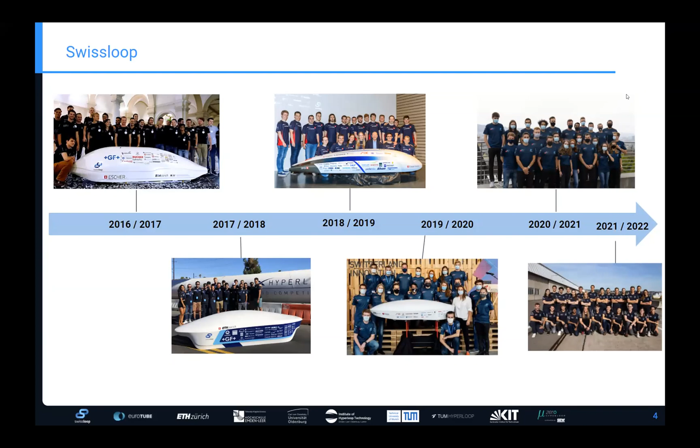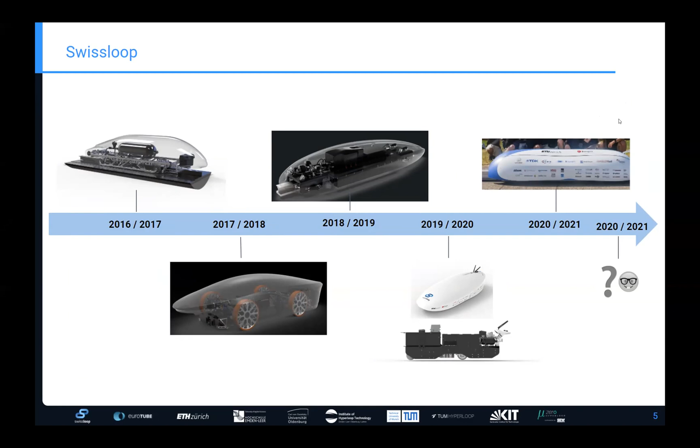In comparison to the previous slide, you can see an overview of our pods, what we've been researching and testing. We started off at the very beginning with cold gas propulsion, then followed by a pod with electric motors. From 2018 on, we focused a lot on linear induction motors and their propulsion. Afterwards we had 3 pods developed and produced where this technology was further refined and improved.

Our next pod will be revealed in around June. We're looking forward to that, and next semester we can include the new pod also in the introduction. Now I would like to hand over to Daniel from the Eurotube Foundation, to give a short introduction about Eurotube.

Just a short wrap up about what Eurotube is about. We are a foundation categorized as a research institute of national importance. Via this status, we've been granted funding from the state, which we use to develop our technologies. As you can see on the right-hand side, we not only concentrate on research and development of our infrastructure, which is our main focus, but we also enable an incubator and transfer platform where other teams, academia, and industry can get together to jointly develop technology towards the Hyperloop industry.

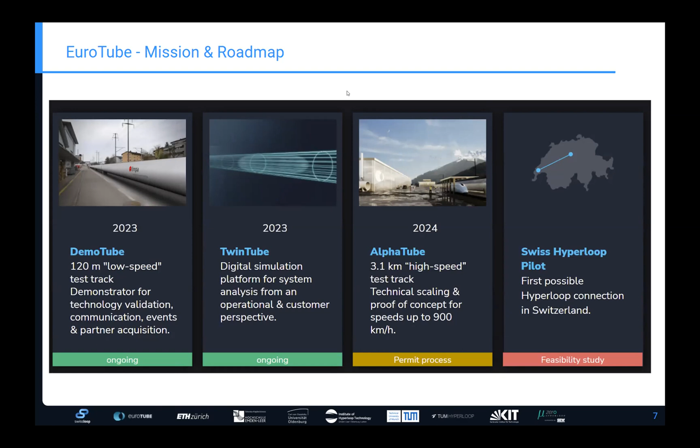To give an overview of the technologies and research projects we've carried out over the last years, you can see on the top left the first prototype of our concrete shell, the so-called Alpha shell, co-developed with Creabeton.

In a second iteration, shown on the bottom right, we permeated the concrete tube with a polypropylene liner, which we successfully tested under vacuum to reach 1 millibar, the pressure we are aiming for in our test facilities.

A picture of how different types of liner have been tested can be seen on the left-hand side. On the top right, you can also see a prototype of a valve, which we are co-developing with the manufacturer Fawate, to have a first prototype installed in our demo tube test track next year.

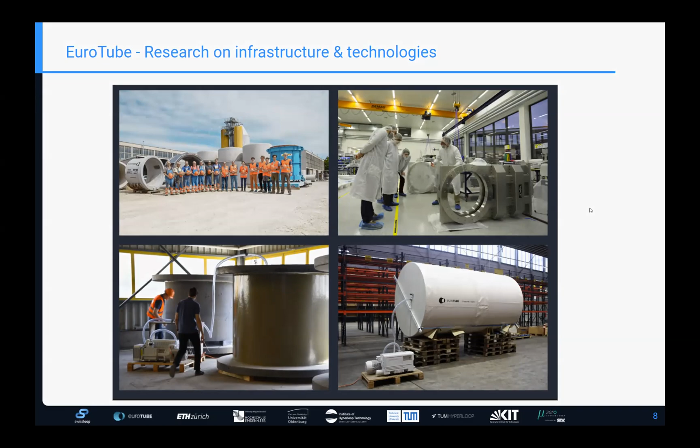We've implemented that into our studies in engineering physics, and now we are focusing on the research side, where we are looking forward to implementing a European Hyperloop test facility, a large-scale research infrastructure, at the old Transrapid test facility.

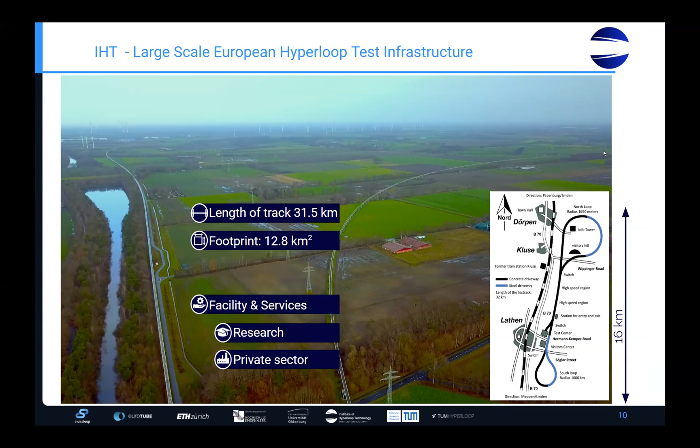On the next slide, you can see that we have phases mapped out for this — three phases you would need to start. First you would look into the superstructure, because as most of you probably know, there is still a lot of development on Hyperloop going on, and not everybody agrees on the special subsystems.

There might actually be a lot of development and innovation going on in the subsystems right now. That's why you start with the superstructure, start with the tube, set up a few of those, and test how elongation, weather, and everything like that affects the infrastructure.

Funny to say, in the second picture you see the Transrapid running, and it was actually only performing from 10 o'clock in the morning to sometime in the evening for some days, because the temperature variations were too high and the track was bending a lot due to these temperature changes.

There's a lot of things you can actually start with early on, and at the end you will have to do the 32 kilometer infinite loop, where you can test full scale, all year round, basically around the clock.

We are also looking into transportation, and how Hyperloop fits into transportation. That's what we are doing in the Epicenter project, an EU project where the impact of new technologies and trade routes is studied. That's where we are doing a lot of logistics related Hyperloop research.

Then there's also the Hyperloop development program, where we are looking into the European Hyperloop roadmap and into large scale research infrastructures. And with that, I would like to conclude our slides and hand over to Elias.

Hello everyone, my name is Elias. I'm team leader of TUM Hyperloop, and I'm happy to represent our team today. I'm pretty excited that we can have the Vacuum Transport seminar on time again, since we benefit a lot from it, not only presenting our own subjects, but also getting inspired from the other topics. That's pretty cool.

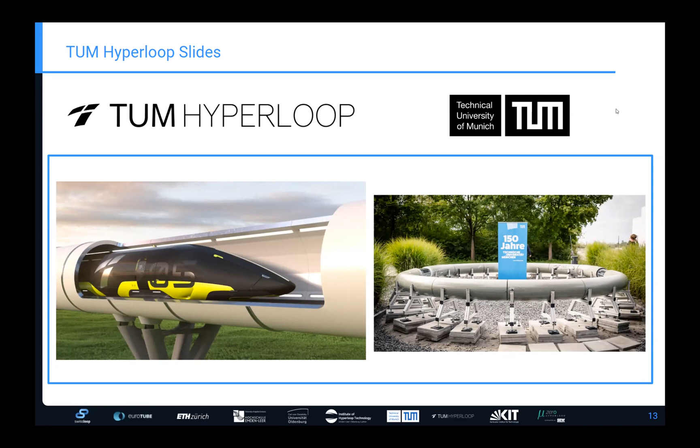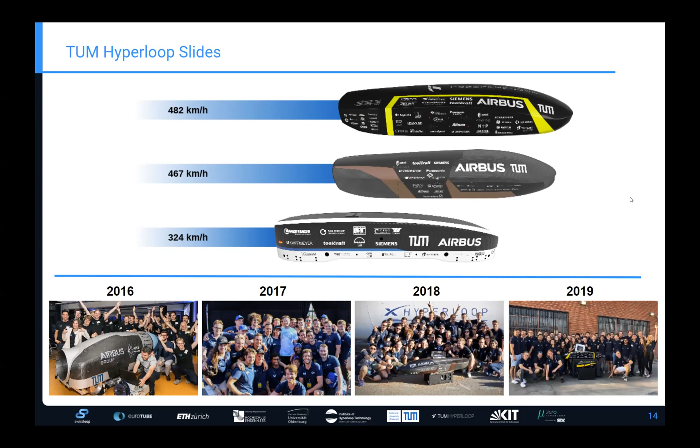That current project started with a small scale ring that you can see here, seen in our first slide on the right-hand side. That's in the past. Now we're really working towards this full-scale demonstrator. This is where all the energy basically goes into, and then we have more major steps towards this Hyperloop technology in a transport environment.

Why I think we can achieve this big mission is because we are positioned in quite a unique setting. We have the Bavarian government supporting us, not only at the press events that we're holding, but also in this whole Hyperloop vision that they're creating within Bavaria.

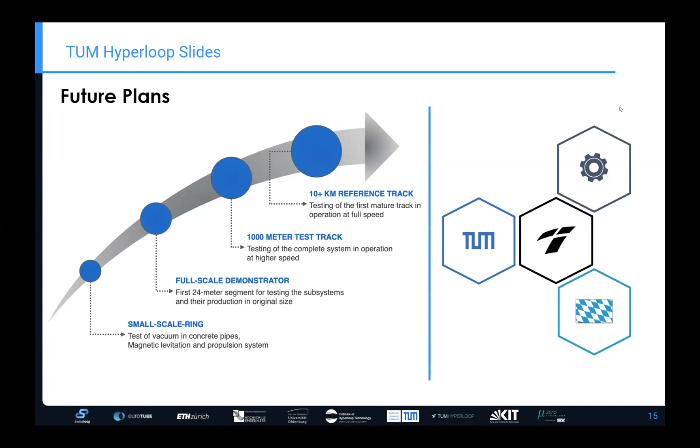Then we have TUM, so we have quite good contact to all the professors in different environments, and also a lot of TUM students who benefit from that, with a big background in technology. And last but not least, we have all the industry partners that were along the road during the competitions, who are going to support us also during this project.

The research areas we're following are the technology development of the demonstrator, some simulations and modeling, feasibility studies and route planning, as well as safety analysis. We also have some talks coming up from our side, happy to announce them in later sessions. Thank you very much.

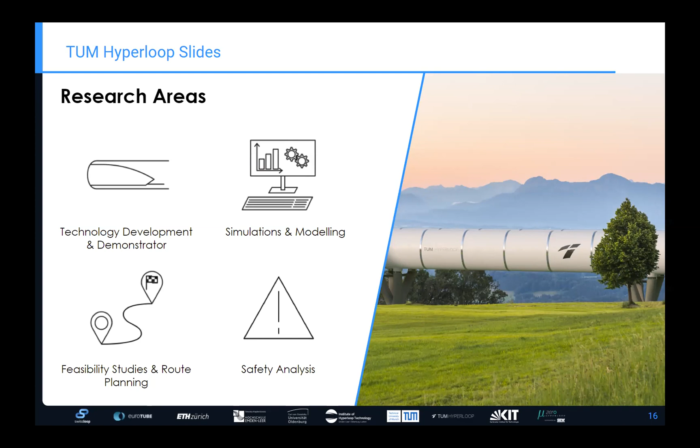Thank you, I'm Pia and I'm representing mu-zero Hyperloop here today. We're really happy that we can also be a part of the vacuum transport seminars. We are quite a young team, only founded in May 2020, so we're only in our second season, and right now we have 71 motivated team members from 4 different universities in Baden-Württemberg. They have all quite different fields of study, so we have a quite interdisciplinary team, and it's really great to work together with them.

Right now we are focusing on building prototypes for the EHW. In the first season, we built our first prototype with a linear induction motor, as you can see on the next slide. We took part with it in the EHW, and it was great to see it run and perform, reaching up to 74 kilometers per hour.

Did the slides change for you guys?

The acceleration we achieved was 5.4 meters per second squared. We were really happy to achieve this in such a short time.

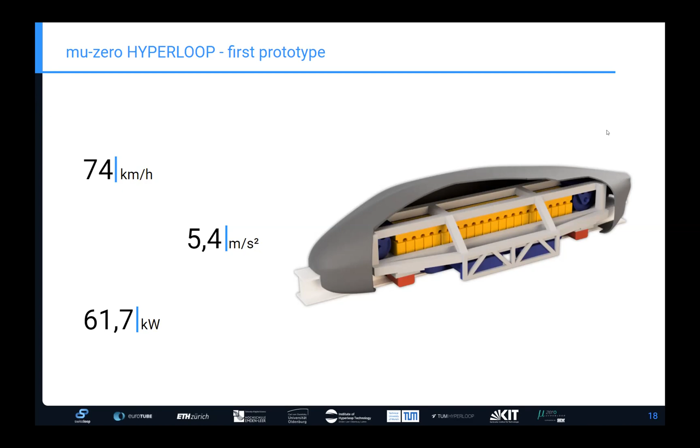For the second season, we want to build on what we already achieved, and we're building two prototypes this year. One is a second iteration of the pod, where we're going to focus more on the shell, the battery, and our frame. The other is more of a research project, looking more into electromagnetic suspension and doing another prototype with this concept. We're also doing more research with theses on general Hyperloop topics, one of which will also be represented here later in the series. Thank you very much for having us here as well.

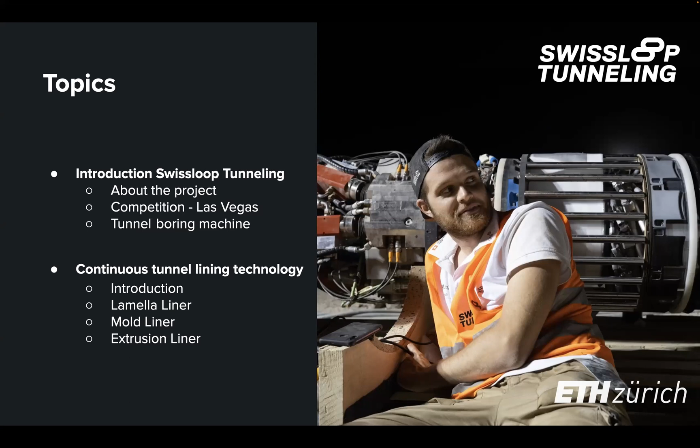Quick introduction: my name is Luca Ontrum, head of mechanical and civil engineering at the project. I've been in the project for about 1.5 years. And I'm Lucas, head of infrastructure and logistics. We recently updated this, so Daniel may have introduced it slightly wrong, but that's fine. I was head of mechanical and civil engineering, and I've handed it over to Luca for now, taking over infrastructure and logistics while helping out anywhere I can, since I've led many subsystems along the way. I started this journey leading soil erosion, which covers the cutting head and the transportation of material from the cutter head to the surface.

So we'll move forward with introducing the project. You can see us here, part of the team at the Not a Boring competition in Las Vegas last September, which we'll talk about later. We were founded in 2020 by engineers from Swissloop, the project you got an introduction to earlier. We now consist of about 60, maybe a bit more, students from different specializations - mechanical, civil, electrical, computer science, and economics - so quite a broad spectrum, but we need every aspect of it. The stages differ too: we have bachelor, master, and doctoral students, as well as some industry partners who were with us at this competition.

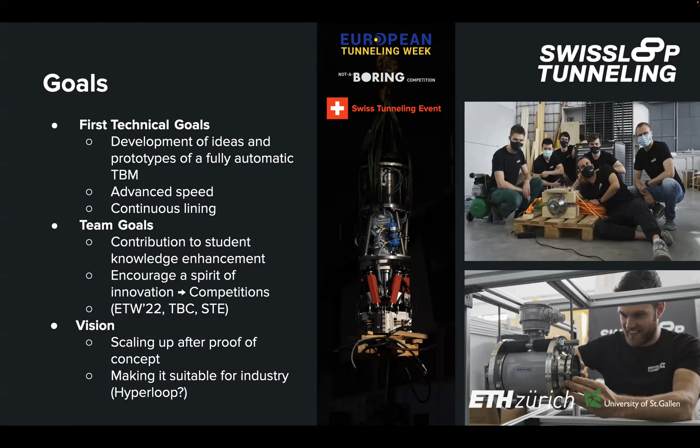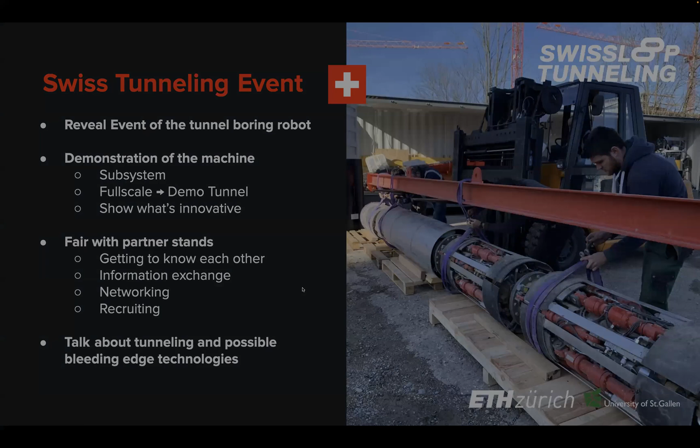Quickly about the Swiss Tunneling event: it's where all our industry partners, of which we had about 90 last year, can come see our machine dig and also do recruiting with ETH students, which is often very interesting for them. The European Tunneling Week will take place in September, where multiple European teams that participated in the Not a Boring competition founded this organization. The topic will be similar - we try to dig a miniature tunnel and compete with other European teams. It will take place in England, very soon.

In the next iterations of this event, it will take place in Switzerland and Germany as well, because the founding members are from there.

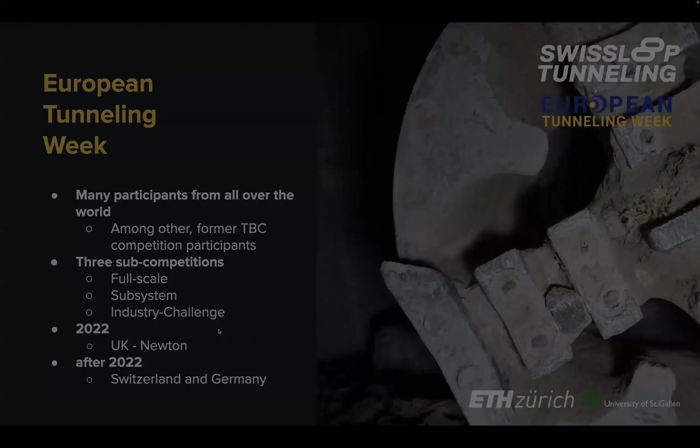This well-known 2021 Not a Boring competition took place in September last year. We had the boundary conditions to dig a 30-meter tunnel with a diameter of 0.5 meter, and we could encounter many different types of sand, gravel, and limestone, which is why in this picture you see the borehead. We didn't have one specific task to dig one specific type of soil, but there were multiple things we had to be prepared for.

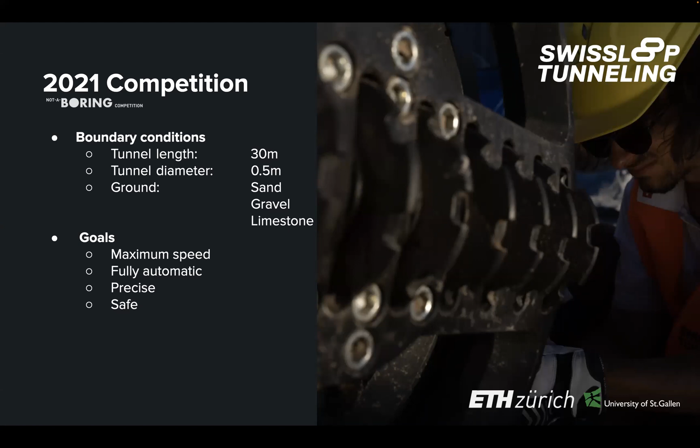Also, it's not easy to get boring probes from overseas, which made the whole thing a bit uncertain in the beginning. The goals there, as well as in future iterations of this competition, were to maximize speed, fully automate the machine, and be as precise and safe as possible.

Participants last year included the well-known MIT, TU Munich, a team from Mosbach in Germany, and also from Warwick, England. These are just 4 well-known names of the 12 participants that got to the final of this competition.

The event took place in Las Vegas, as mentioned before. We finished the last project year by winning the Innovation Award in 2nd place at the competition, and this gave us a very large reach in Switzerland and internationally.

We became the largest Swiss student engineering project, and we were covered in over 70 media articles. Some of them you can see here: 20 Minuten, Südostschweiz, SRF, and so on. We approximate that about 1 million Swiss people were reached.

Now we will cover a bit of the aspects of the tunnel boring machine. So now it will be technical.

Our TBM that we built last year is called Groundhog Alpha. The length is about 7 meters, it's about 2.4 tons heavy, and can propulse forward with a force of 200 kilonewtons, which is about 20 tons. The driving torque in the beginning is 8.5 kilonewton meters.

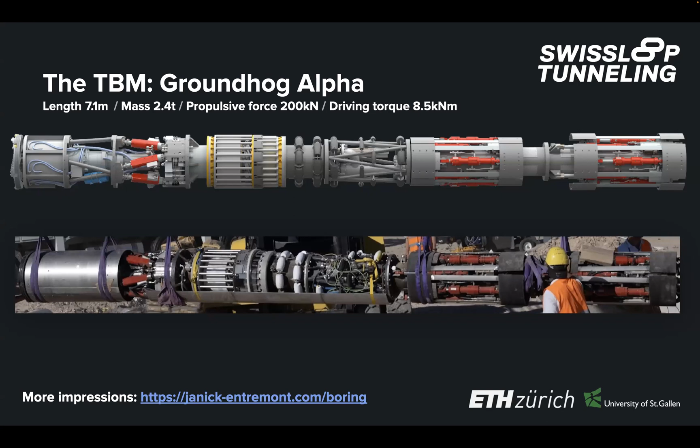All right, we'll go into a bit more detail now with the continuous tunnel lining. I think it's more interesting to know how we construct it and why it's important to construct it continuously. Luca mentioned this already.

I wanted to give you a short overview of the problem we're facing in the tunnel industry. Since it's a small machine with a diameter of 50 to 60 centimeters, we're competing against press or pipe jacking.

The pipe jacking approach is just pressing in prefabricated segments, mostly concrete with steel tubes inside, pressed from a start to a finish shaft. You need a start and finish shaft. You can do it like dry or liquid conveying - that's how you get the material out from the front all the way to the back.

It can be done continuously - that's not the issue there.

Disadvantages with this approach are that you have to press from the beginning all the way to the end, and the propulsion force is then proportional to the length, because friction along the length increases the further you get, and this requires large pressing plants.

It needs anchoring and conditional construction shafts, as you can see in the picture on the right. And this pressing of prefabricated lining...

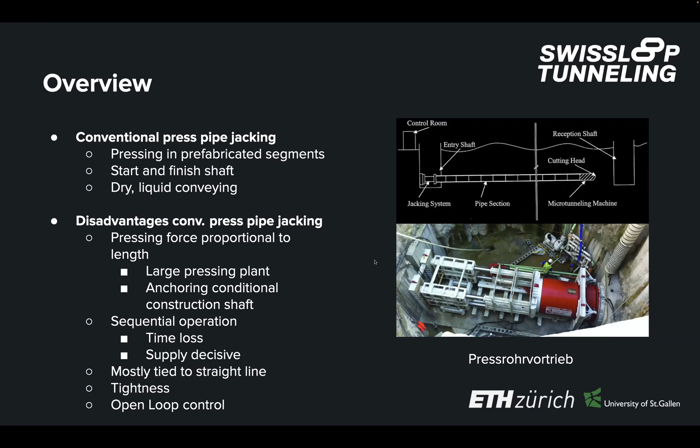That takes away the knowledge part of a worker's capabilities, and I think it's much more safe and a much better approach for this time.

For continuous tunnel lining in general, you need to know that first off, erosion and transportation of the material needs to be continuous. Then the lining production needs to be continuous. Propulsion, advancing forward, needs to be continuous. And also the supply, which is mandatory or even decisive in most cases. This is the continuous tunnel lining production approach, which is very good for a closed loop control.

So Swissloop Tunneling's solution: we're pursuing a solution for continuous extrusion of polymer as a lining, not concrete. It doesn't need to specifically be concrete or polymer, it's something we're looking into, but it needs to be fast curing because we are clamping against it and propulsing ourselves within the tube we're producing. We're pressurizing it. And that requires, from statics, tensile strength to activate this propulsion or clamping force. It also needs this bracing possibility in loose soil. Gripper machines are done in many large TBMs, but it's never done in soft TBMs, in soft soil. So this is a huge advancement from our side.

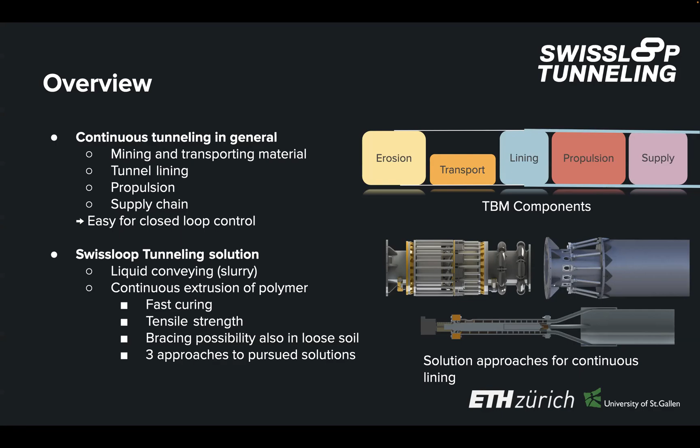We're pursuing 3 approaches now, shown on the right. We have the Lamella Liner, which I'll go into now, and the mold liner, which is a pressurized system. The other one is a flow controlled system, and then an extrusion one using another type of polymer, a one-component polymer, which will be Lucas' part.

For the Lamella Liner, that's what we're currently looking into. As you can see at the bottom, it's actually being built. It's a prototype still, but it's built. It consists of 12 nozzles which 3D print this tunnel lining segment. We have an outer and an inner lamella, a sort of sandwich.

The outer lamella is a glass fiber lamella, and the polymer filling is a 2-component MMA. It's mixed shortly before, so you can see those segments with static mixers inside them. They mix those 2 components and activate them, then it's extruded and filled within those 2 lamellas. The inner lamella is just for cleanliness and like a safety film. We need about 14 millimeters - I'll get to how we determine that to resist gripping and propulsion forces. It's obviously a continuous process, since 3D printing in general is continuous.

The huge problem for us was that the Young's modulus, or E modulus, was very low with polymer in general. Polymer, as you know, is very soft compared to concrete or even steel. The modulus is around 5 gigapascals for the polymer we're using, maybe lower for lower hardening times. And then we have a soil that we took as a friction angle of 25 degrees and a weight of 18 kilonewtons per cubic meter.

We assumed or looked into gaps between soil and liner, because the soil is actually the support for this liner - prefabricated or in-situ created - which is then pressurized not only in radial direction but also longitudinal direction with about 20 tons of thrust. So it needs to withstand that, and we did some buckling calculations and simulations for that.

The clamping forces are calculated with a friction coefficient of 0.5. We have individual clamping of around 51 kilonewtons, and the total, as I said, about 20 tons. In addition to all of this, we have a curvature we want of radius 167, that's just how it is with the competition we're participating in. And this leads to a huge buckling problem.

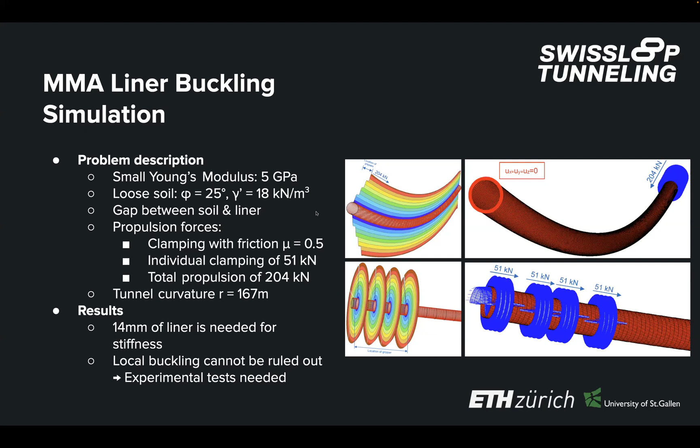Results of those calculations were that we need 14 millimeters for the stiffness. If the Young's modulus is low, you obviously need a huge stiffness - the moment of inertia, if you're familiar with this. Local buckling was a bigger problem than global buckling. We saw that during clamping onto the liner, the individual sections of 51 kilonewtons, the local stiffness where you clamp is very low because the hardening time is lowest there. We need a lot of experimental tests to verify those results, because they're very theoretical and based on assumptions we haven't experimentally proven yet.

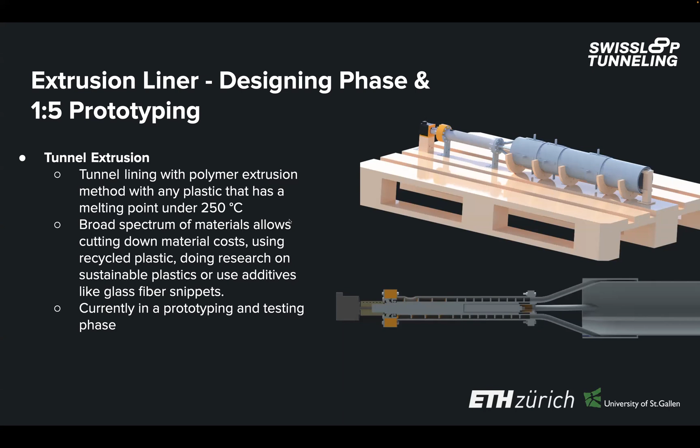In the beginning, we're doing a 1-to-5 prototype just to check our assumptions. The next system is a bit closer to home, to what we already have in the workshop downstairs. It's the mold liner, where the dosing and mixing aspects of the two polymer components stay the same from the input side, but the output changes. In this case, we're not using lamellas or rolls to unroll them anymore, but instead an injection method to inject this hardening polymer out. This is also in a designing and testing phase, to check whether the materials we'd like to use as layers in between work well with our polymer. The advantage would obviously be that the mechanism is much more simplified, which is always great in engineering, but also that we can keep the pumps and the setup for dosing and mixing, which is a huge part as well.

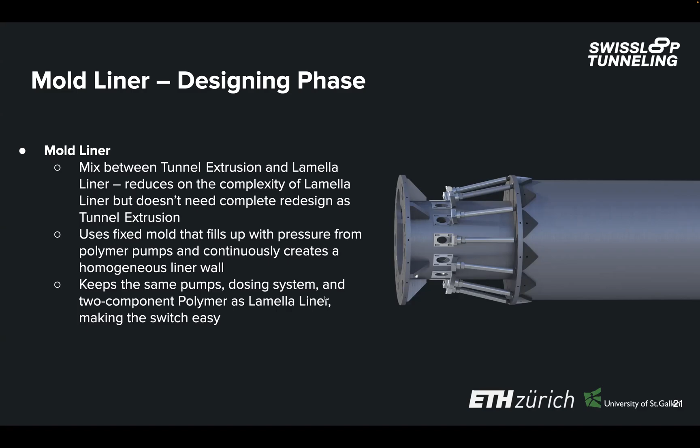This is it for an overview of these new systems we're looking at, and we thank you very much for your interest in this topic and for paying attention to the presentation. I think now it's planned to have a bunch of questions as well.